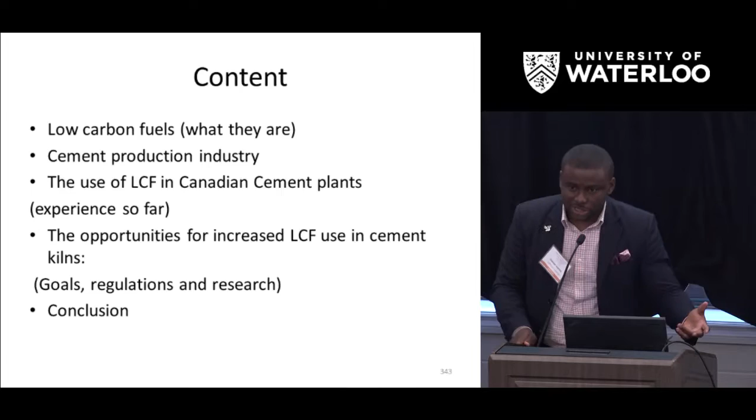So basically, low carbon fuels—a simple equation where we say that when we burn anything, if it has carbon in it, we produce carbon dioxide. If it has anything else in it that can oxidize, then we produce the oxide of that. What it means to call something a low carbon fuel is that on a gigajoule-to-gigajoule basis, meaning on an energy comparative basis, I produce less carbon dioxide than my reference fuel.

The reason we do this on an energy basis is because most of the time there's a misconception when we use mass. For example, plastics contain about 42,000 kilojoules per kilogram of energy, and coal has about 30,000 kilojoules per kilogram. So on an energy-to-energy basis, I need less plastic to produce the same energy that coal will produce.

Because of this reduction, there's also a repercussion in the reduction of carbon dioxide due to the carbon content of plastic. So I'm not only reducing CO2 because of the carbon content in plastic, but because of how much plastic I need to produce the same amount of energy. That's how the term low carbon fuels was developed.

You'll find that we're transitioning away from waste-derived fuels because the terminology is a philosophy, and the term waste itself carries a stigma that we've encountered even in the communities we work in. When we say we're going to get energy from waste, people say, well, it is waste. But when we say we're going to get energy from a material, they're so enthused about it. Just the term waste has thrown this whole idea into a cycle where we always have to regenerate new ideas to get people on board.

Now, we've spoken about so many ways of getting energy from waste, but cement production is unique in a lot of ways. First, going from raw materials to the end product, there's a necessity for heat and a necessity for certain types of raw materials—for example, limestone and clay. Limestone gives off a lot of carbon dioxide. The necessity of cement makes it necessary for us to use limestone, which gives off about 60% of the carbon dioxide that comes off a cement kiln.

So there's already a footprint to deal with when you're producing cement. Cement is produced in long kilns - I like to describe them as a lot of limestone, clay, fly ash, and iron on their way to hell. There's a burner on one side, and raw materials on the other. As they approach high temperatures, about 2,000 degrees Celsius, they transform, they clinkerize, and then form the material we call cement that we use for all our infrastructure.

Now, the cement kiln is so designed that it becomes a scrubber in itself, because there's a lot of raw material and fuel on one side, and then there's a stack on the other side that lets go of emissions. I wish I had a picture to show that, but I think I will do a good job explaining it.

Now, the emissions that come from cement kilns typically come mostly from the raw materials and the chemical reactions that go with it. We are transforming calcium carbonate into calcium oxide, so we give off carbon dioxide. But we do this in the presence of a lot of heat, generated by fuels, and these fuels contain carbon, so they also produce some carbon dioxide. There are other oxides that are produced.

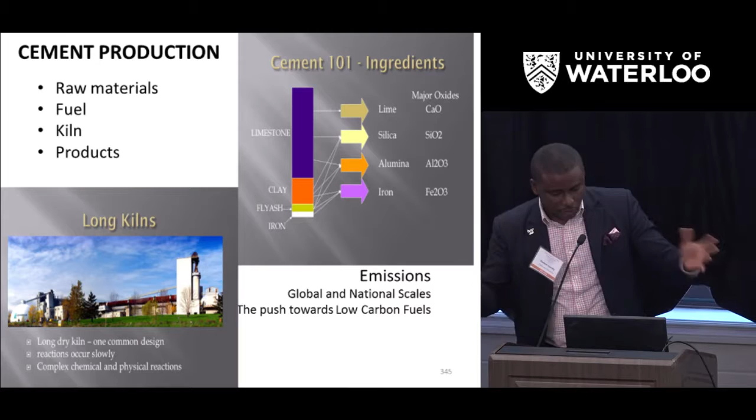Basically, to reduce the footprint of the cement industry, there are so many things they can look at - it's a fourfold strategy. The first one is to reduce the clinker components of the cement, because calcium carbonate is giving us carbon dioxide. That's a very difficult choice to make because of product quality.

Then there's also reducing the energy needed to make the clinker - are we able to design processes so we don't need 2,000 degrees Celsius of flame to produce clinker? And then there's one well within our range: to reduce or replace the fossil fuels, which is coal, with low carbon fuels, which is what I will address today. And then there's also the opportunity to replace limestone with other alternative raw materials.

Most of the work I have done is concentrated on replacing fossil fuels with low carbon fuels - examples I'll give as time goes on. In replacing these fossil fuels, what we're basically doing is stopping the removal of coal, which is carbon in itself, and pet coke, the typical fuel in cement kilns. We're leaving it right there in the ground, so we're saving that.

Now, the second thing we're doing is taking things from the landfill, so there's no CH4 from landfills - all these things are being redirected into a cement kiln. And the final thing we're doing is, because they are low carbon fuels, we're also affecting the emissions at the stack of the kiln. So it looks like a three-pronged solution to the same problem. I think the cement industry can play a huge role in forwarding low carbon fuels in this direction.

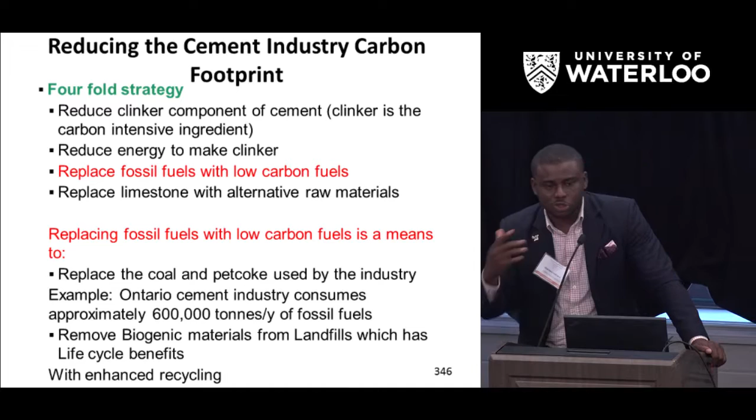Now, cement production is different from incineration. Usually the first thing that comes to mind when we think of burning is incineration, where we're just waste managing, burning the stuff and taking the ash and doing something with it, or burning to produce electricity. It's very different because in operating a cement kiln, the ash itself is incorporated into the cement, so usually there's less waste in the solid aspect.

Then there's the fuel quality for cement kilns, which is also regulated by their own standards - it's a self-regulatory system where the more chlorine, the worse your cement, so you might as well get the best. For example, technically PVCs will not be allowed into the cement kiln, and PVCs will also give off emissions that are technically harmful to people. And then there was also the positioning of cement kilns in a hierarchy.

If you look at energy as a product and cement as a product, technically what we are doing is taking a landfill-bound material and making it into a value-added product, cement, which is well needed across the world because of infrastructural development. If you look at incineration directly, we are disposing of it and have to find a way to deal with the ash. But in the cement kiln, we are making a new product essential to population growth.

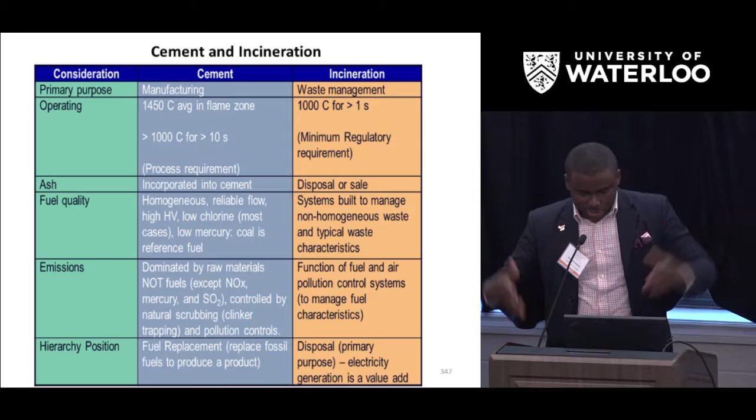So talking about the differences between the two, I'll discuss the experience of Lafarge. They're using so many different types of low carbon fuels in different ways. We're looking at asphalt shingles. We have many million tons of asphalt shingles, for example in Nova Scotia, that were lying around. We didn't know exactly what to do with it, since shingles have high content of asphalt, which is energy burdened.

There's some separation done at the landfill site, which is one of the main things. The pre-processing is usually mostly mechanical, no chemical pre-processing, which saves us a ton of time and energy. But the mechanical processing also comes with its own problems. I'm just concentrating on Brookfield because that's where I'm working.

There's also non-recyclable plastics, which they started working on. I think tomorrow they're going to be commissioning a plastic handling system with an asphalt shingle handling system. Then there is C&D, which is usually made of wood, unrecycled plastics, non-treated wood, and some plastics in there. That's what they use in Brookfield.

Coming westward to Bath, they use way more - the cocktail is bigger. Asphalt and railway ties. This is localized based on what we have in the local municipality, so you can pick these ideas and apply them in local municipalities. If there's no cement kiln in the municipality, we can look for a neighboring cement kiln to use for that.

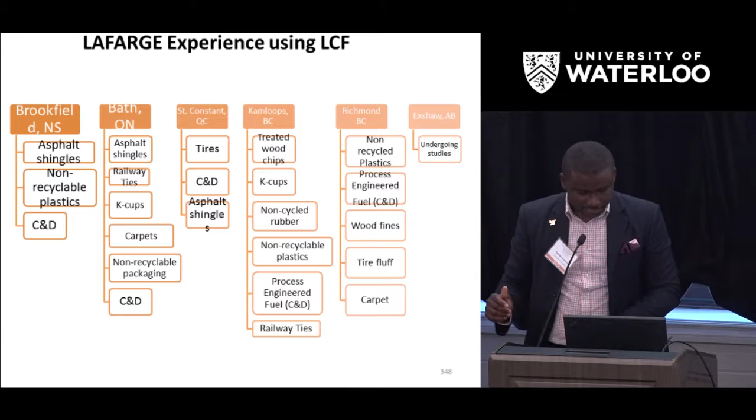Because of the vast experience Lafarge has had, there are specifications they've come up with based on experience. The energy value has a range, and that's where you might get some plastics and some shingles - the energy content of the material should be big enough. It should not have too much moisture, because moisture will take most of the energy out, and then we won't be able to hit the temperature range needed to clinkerize our limestone. There are also specifications on carbon content and on homogeneity.

How we come about this homogeneity is the problem - who does it? That's what I was discussing with some of the municipal leaders. Who does it? That's the question. And then removing the non-combustibles to be used for cement kilns. So some of these things are specifications they look out for, and I put some pictures of the things they work with currently.

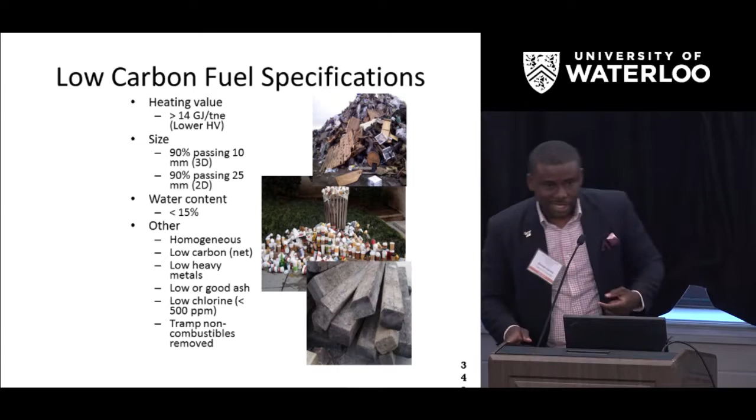Now, the opportunities going forward - there are three things that will drive the use of low carbon fuels in cement kilns. The first will be favorable regulation, which we are beginning to see, because even in defining what alternative low carbon fuels are and giving the science good recognition in policy, it's become easier for us to determine what is a low carbon fuel and what the benefits are.

That's what Ontario is doing - I think there's a website that leads to the regulation. It clearly defines what an alternative low carbon fuel is. It's a big step in that direction, and also has systems for approval testing. Quebec has had a long-standing policy recognizing this - they don't call it waste usage, they call it valorization, which is also positive. In Nova Scotia, we've developed a testing protocol for LCF, which is good - somebody can bring a fuel for testing, and we check it to see whether it is good for cement kilns or not. So we're not just grabbing everything.

In Alberta, the carbon tax and similar policies in BC are helping drive things towards low carbon fuels, because coke, petcoke, and coal are becoming more expensive with taxation. So there's motivation on the regulatory sector, and also opportunities for increased LCF use in the future because of innovation at cement plants, driven mostly by the motivation to cut down costs.

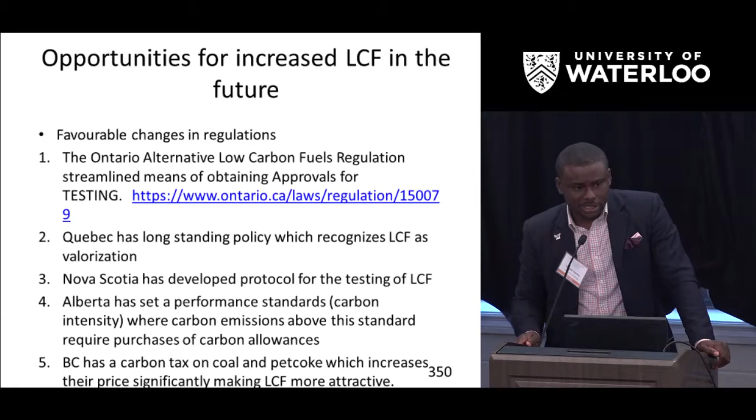For example, in Lafarge, as I mentioned, tomorrow they'll be in Brookfield trying to get to 30% substitution, opening it just tomorrow. There are consultations in Ontario to see if plastics can be used. There's motivation for the cement industry, and because it behoves them to get the quality of clinker right, they have a self-regulatory system where they don't accept anything that creates more waste. It's actually positive. Most of my schooling and PhD has been funded by these cement industries and governments trying to get waste out of landfills.

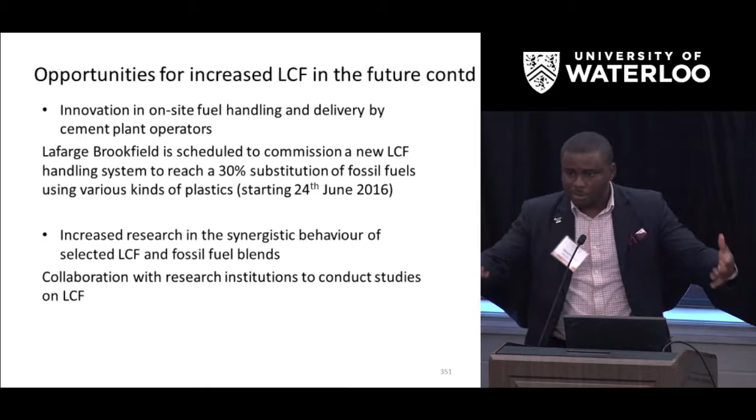So quickly, in the next 5 minutes, I'll run through some of the work that's been done in the research sector for LCF. These are the opportunities we have: we need to study the combustion kinetics. Now we see them on the macro scale, what happens in the kiln, but what is happening on the kinetic level? What happens when we put coal with plastic? If we understand it more, we can see how to bring in more fuels.

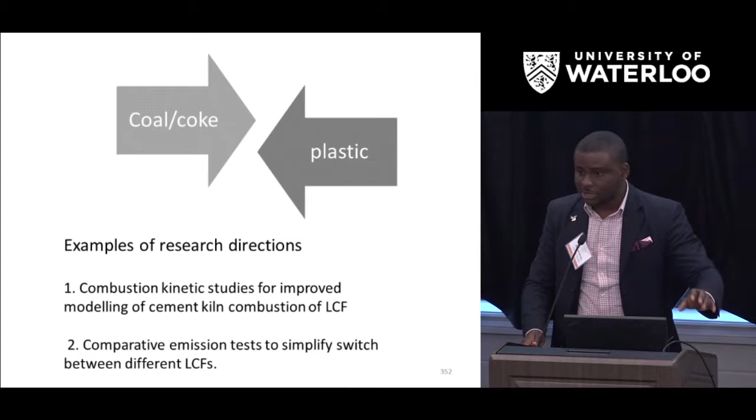We also have to test them on the basis of emissions. That's what my work has been over the past 4 years. I've used literature work conducted all over the world, predictions based on elemental analysis, which a lot of policymakers use as a preliminary check, and then experimental determination of combustion products. My professor, Dr. Gibson, stands by equipment attached to a lot of testing devices, and we check emissions from combustion experiments.

Some of the results we got, for example with C&D plastics, show clearly from calculations a 34% decrease in fuel CO2, straight away qualifying it as a low carbon fuel. For SO2, there's a 98% change because of the sulfur content in the fuel, but there's also a lot of sulfur in the raw material, so we don't know how that translates into actual SO2 savings. On a fuel level, there are savings in NOx, with only an increase in H2O. This work in our lab has given us the approval to test some of these fuels.

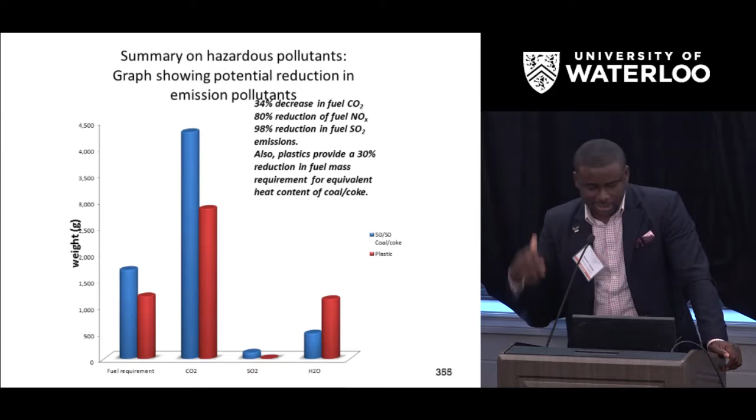We also did some work separating different types of fuels, looking at how well they combust and what the benefits and savings would be. We looked at C&D plastics, plastic film, which we talked about today, textiles and clothing, and carpets and containers. You can see in the table that even though they're all in the family of plastics, there are many differences between them.

Looking at clothing, for example, because of the additives it goes through, the gaseous emission savings we see, for CO2, was less, around 16% for clothing. For C&D plastics, there's almost 34% decrease in gaseous emissions, like I mentioned. For containers, these are HDPE containers, there's also an 18% decrease. So we've done these tests and this analysis gives the go-ahead for some of these low-carbon fuels to be used specifically in cement kilns.

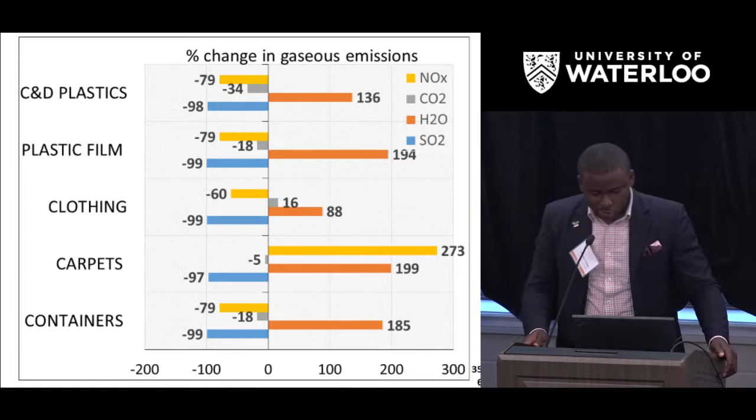We haven't done any work on energy recovery for electricity. So basically, the conclusion is there's ample evidence for the benefit of LCF as a resource recovery tool when used in a cement kiln. The cement industry has displayed considerable readiness to use LCF, motivated by carbon footprint and cost of production. There are also opportunities for expanding knowledge in the science of LCF.

How do these things combust? What's the morphology of coal when mixed with plastic? How does it move from volatilization to char? The study is huge, so a lot of academic research can go into it and we can gain a lot of understanding. We can also look at well-informed regulatory modifications helping drive the diversion of these materials from the landfill. So basically, this is what low-carbon fuels are doing in creating a circular economy with minimal waste and loss of energy. Thank you very much.